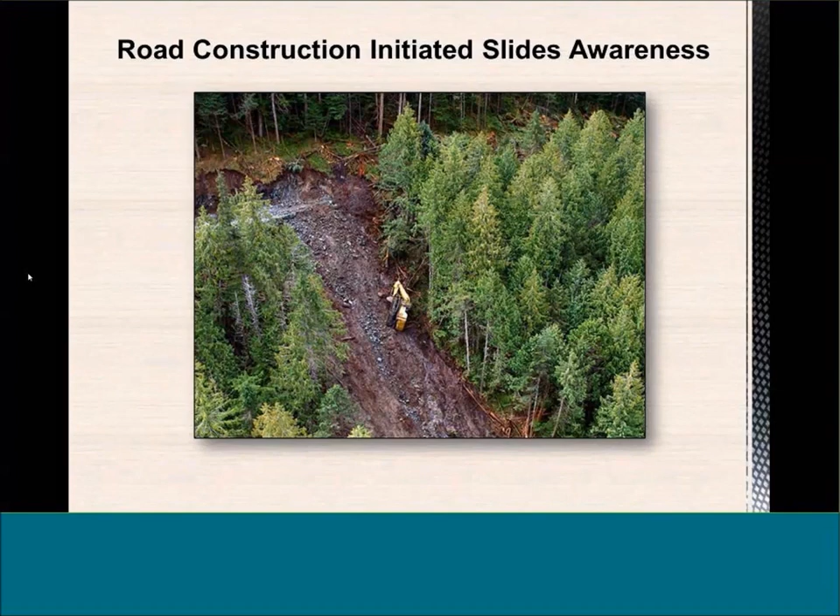During this presentation, we'll give you a brief outline. We're going to talk about the formation of this group, some of our mandate, what we're trying to achieve, and then we're going to get into the details of the construction-initiated slides.

We're going to talk about some of the contributing factors, look at some personal safety related to landslides, and review factors that contribute to them and ways we can mitigate, such as the plan, soil conditions, drainage control, construction techniques, what to do when you change the plan or why a plan should be changed and when, and some of the costs associated with these landslides, both environmental, human, and monetary.

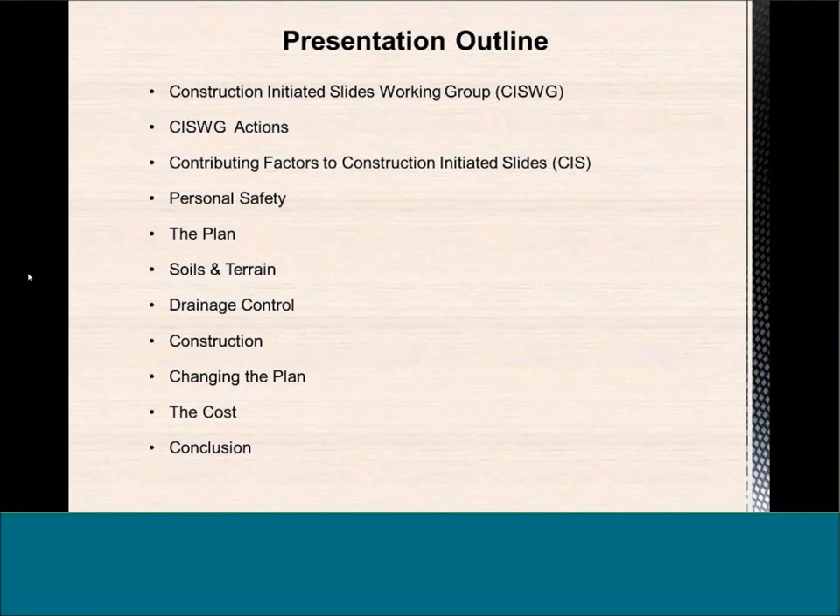And then we're going to sum up with a conclusion. There will be several presenters during the course of this information session, and they will introduce themselves as they come on board.

So again, the Construction Initiated Slide Working Group was struck through conversations around landslides. The forest industry knew that something had to change, things needed to get better. So this group was tasked with coming up with some recommendations and factors to eliminate these types of landslides.

The committee consists of a collection of professionals such as myself, geoscientists and foresters. There's road building contractors that sit on our committee, and we're supported also by provincial agencies. Our focus is to improve coastal road construction to the point where we are minimizing, reducing, and in fact eliminating these types of landslides.

We have short, medium, and long-term strategies. We're trying to look at some of the quick wins, also trying to look at some of the deeper, more challenging issues and come up with something in the big picture as well.

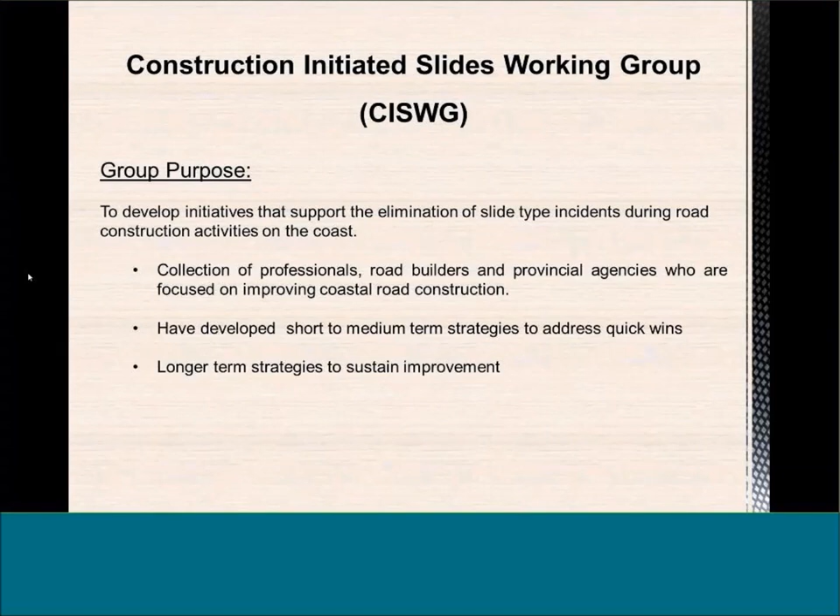So our working group is focusing on data collection - that means how many slides have we had, when and where were they, what caused them, what are some of the contributing factors. We're going to focus on raising awareness within the industry around this significant issue, talk about training methods and resources for crews and professionals, such as this presentation you're looking at, hopefully identify new ways to build road and work through some of these sensitive areas to make work sites safer for everybody, and explore options for monitoring and enforcement of construction standards.

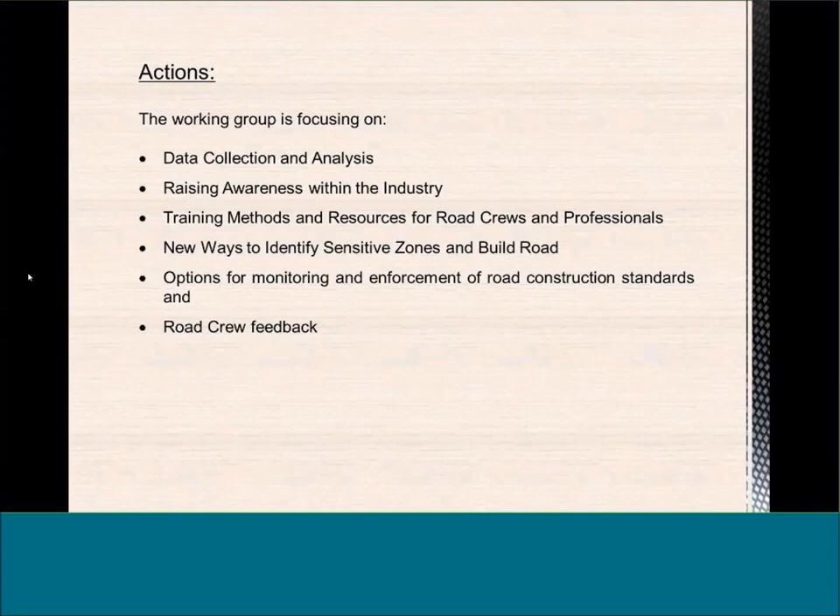And we are also very much looking for road crew feedback. It's very important to what we do. We recognize that road constructors and operators of equipment are very highly skilled professionals, and that can't be overlooked.

So again, for some background, we know through our data analysis that between 2012 and 2015 we had 36 construction-related slides. These are the ones that we know of, that have been reported and that we're aware of. Many of these involved excavators sliding down the hill, such as the one you can see in the picture on the left.

Fortunately, we have had no fatalities during that window, but we have had significant injury. We know that some of these operators have in fact left the industry and never gotten back in the seat of an excavator. We also know that the monetary cost of slides can be very significant, ranging from $200,000 to $500,000. So although there's no physical injury, the cost of these is certainly enough to bankrupt a contractor in some cases, and that trickles right on down the line to all the employees. Not a desirable place to be.

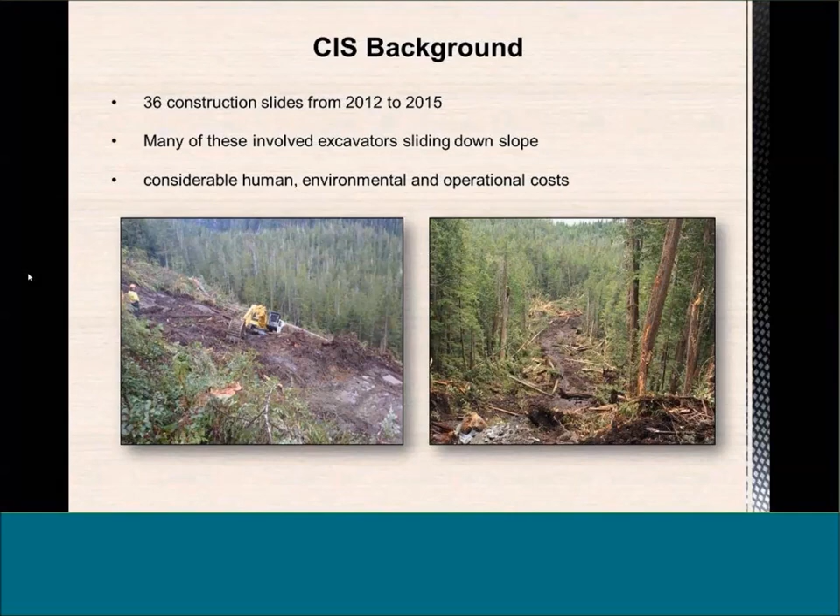If you look at the slide on the right, clearly we've got some significant environmental damage as well, and this has to be considered. The forest industry on the coast is very proud of its ability to work under environmental management systems and leave the lightest footprint we can. So when we're having these types of landslides, we're certainly not feeding into that mantra.

We're going to start off by going through some examples of construction-initiated slides on the coast of British Columbia. We're going to do this just to give you a sample of what's happening out there. Some of you will be aware of these, others won't, but we're going to show you what we've seen, and another reason why we're sitting at the table trying to come up with some ideas and solutions.

This picture demonstrates a set of landslides that occurred in a place called Huaskin Lake, located on the central coast of British Columbia, mainland portion. Both of these slides occurred within one potential cut block setting, and you can see the road heading in the picture as well. You can see how close these two slides were to each other. I'd like you to note excavator number 1 at the bottom of slide 1, excavator number 2 at the top of slide 2, and the two fallers noted in red at the bottom right corner of the slide.

These slides occurred—the first one in April, the second in July. They're very long slides, both several hundred meters long, and conditions for both were what we'd consider relatively dry for that time of year.

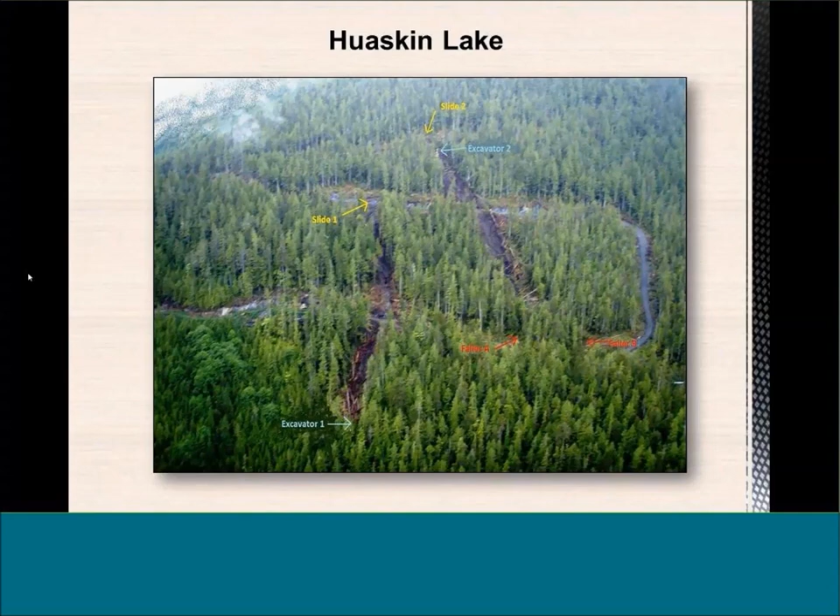So let's get into a bit of detail. This is a photo of the top of landslide 1, or the head of the landslide, which occurred in April. This slide occurred on moderate slopes, 30 to 45%. It was balanced cut and fill, and the road heading was currently transitioning out of a bedrock-dominated cut. So they had just started excavating into a thin pocket of wet, organic-rich soil, which is very common to that central coast mainland portion, over top of some compacted gray, sandy clays.

Above the landslide, the slope showed some wet site indicators such as skunk cabbage, which you can see in the picture, and there was also some Indian hellebore noted at this site. So those were potential indicators of something wet going on under the ground here.

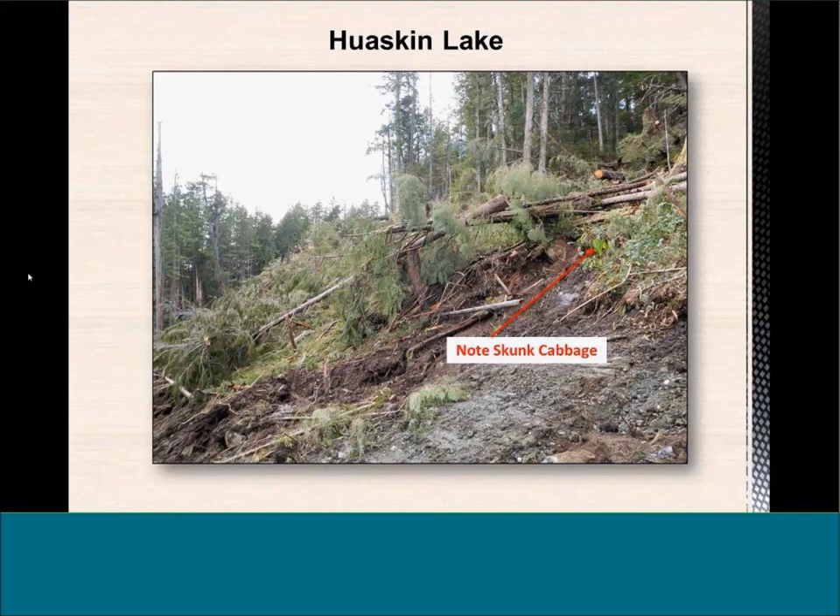Now this is the bottom of the slide. This excavator slid several hundred meters on moderate slopes down to the old road. It was then hit again by more landslide debris and slid another 100 meters before it stopped on a bench. You can see from the photo that this excavator ended up half buried in mud and surrounded by trees. Obviously not a fun situation for the operator, and we know there were some significant psychological impacts to him—it was very challenging for him to get back in the seat and continue his career.

To remove this excavator, a tote road had to be built, so there was extra cost added to this project. WorkSafe investigated this site, geotechnical reports were obtained, further investigations were done, and there was quite a bit of follow-up work to do. We know for a fact that this road heading was shut down for a significant period of time. Eventually the road was moved into the bedrock a little further uphill. Several full bench prescriptions were added, and it was felt safe to proceed even through these wet areas with a more cautious approach. But the key message is the show was shut down, and there was significant time and cost added to the project.

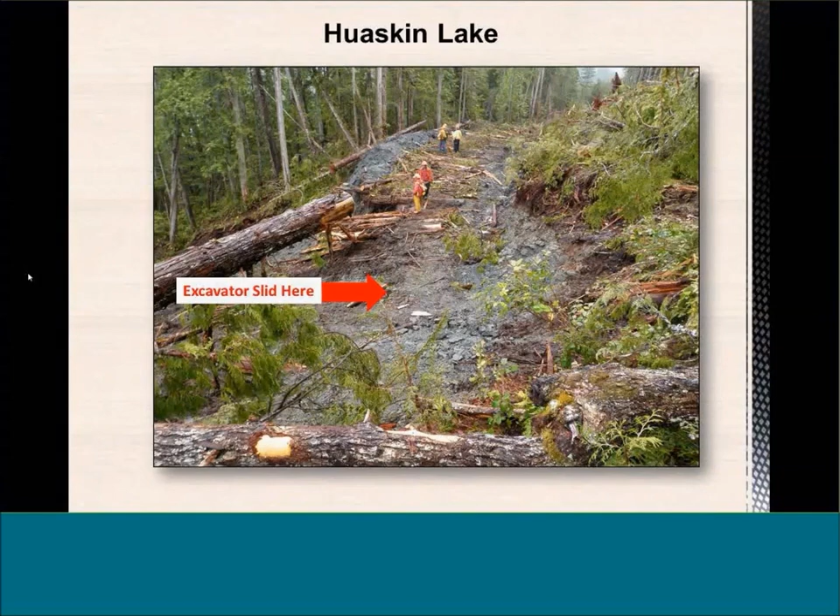Once road construction commenced, landslide 2 happened, in July of the same year. Again, similar slopes, 50 to 60%, moving through a wet draw. You can see similar types of soil in this picture. The prescription here was for full bench end haul, but clearly full bench end haul was not occurring. Rather, the operator and the hoe were working on punching on top of wet organics, over top of compact gray sandy soils—a condition that's ripe for disaster, which is exactly what occurred.

Similar to the first landslide, the operator heard and saw some water flowing around him. The ground gave way about 20 meters below the road, and the excavator slid about 20 meters downhill before his bucket grabbed hold.

Then the landslide continued as a mass of mud and debris, traveling another 150 meters until it crossed the lower road, and ultimately terminated about 250 meters down on some lower benches. So a very long, significant slide.

Certainly, for me, I was very encouraged to see the excavator still at the top of the hill. Who knows what the result might have been if that machine had slid all the way to the bottom.

Eventually, this machine was winched back up the slope, but not after WorkSafe came out to investigate, as well as continued investigations from the licensee.

The geoscientists had to come back in and take a look, and ultimately it was decided that this road heading should be terminated due to very high risk, and this harvesting opportunity was ultimately lost.

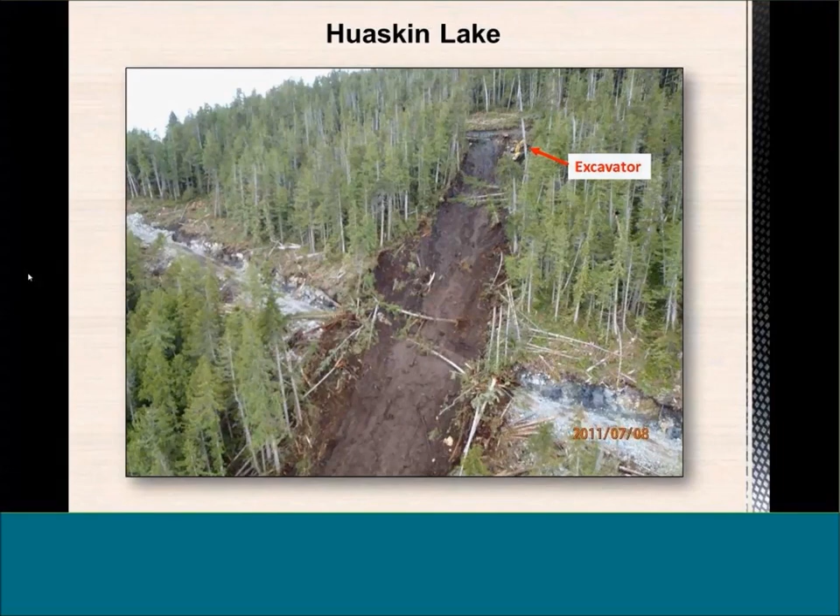The next example is of a slide that occurred on Yeo Island, also located on the Central Coast. This particular operator was just completing an end haul transition zone.

He was on some moderate slopes, again 50 to 60%, when he encountered a pocket of deep, wet organics, similar to what we saw in the previous examples, and some subsurface water. I visited this site, and you could actually see water piping out of the hillside just above this landslide.

These obviously were not identified on the original plan. It was dry conditions - you wouldn't have seen them, and you wouldn't have noted them. So very tricky to catch all that in the plan, but in the end, the operator saw it.

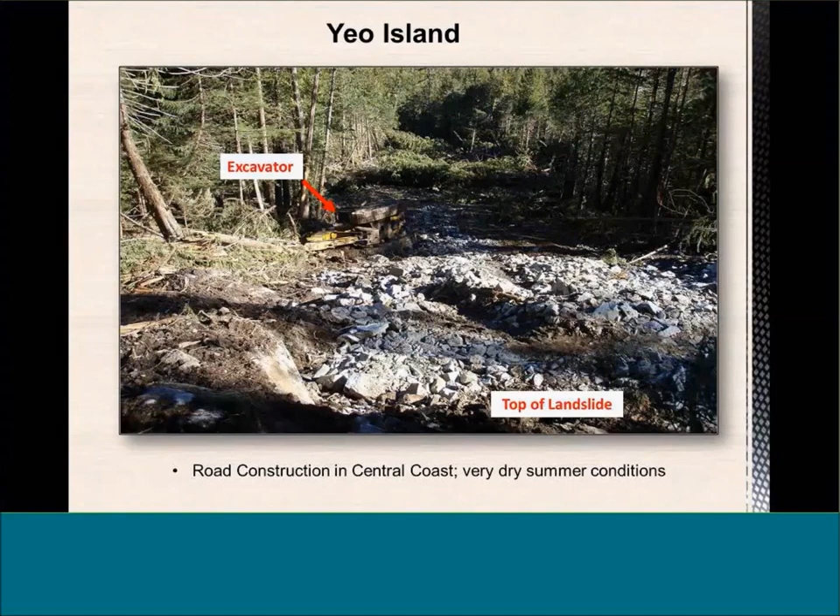The operator didn't stop and ask. He didn't stop and seek any clarity or advice on the plan or the changed conditions he was noting. He continued to move ahead and ended up with his excavator on top of wet organics over smooth bedrock. And very quickly, his excavator decided to migrate to the bottom of this hill slope in a landslide.

This picture gives you a little bit of an idea of how potentially disastrous this could have been. Why the excavator stopped and flopped over on its side and stayed put there, we're still not sure, but we're very fortunate, and the operator was also very fortunate.

This operator left this site that day and, to my knowledge, never got back in a machine or built road again. On top of that, this site was shut down for 6 complete days.

During those 6 days, geoscientists, WorkSafe inspectors, company reps, and others inundated this site while they tried to come up with a second plan. Ultimately, we had to build a tote road down to this machine and remove it. So think of all the costs involved with those things.

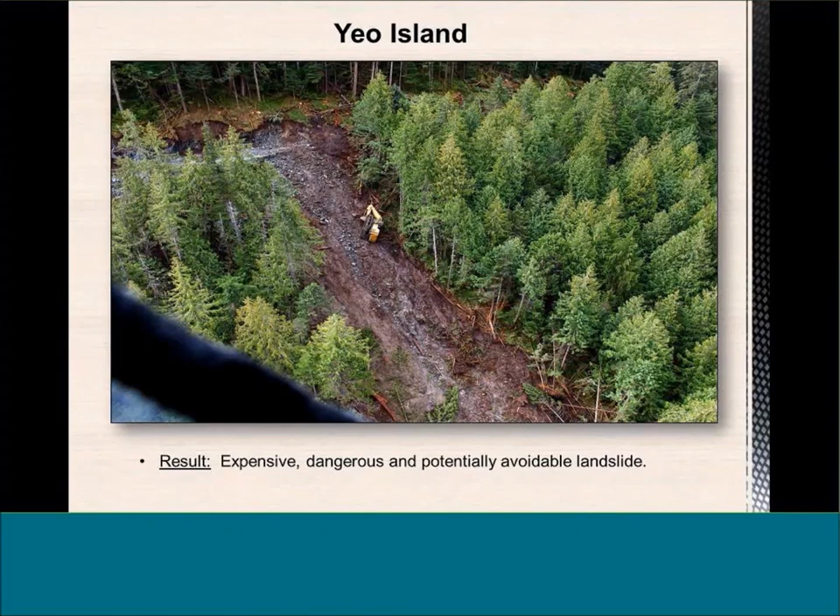In fact, here are some of those costs. Again, while this operator wasn't physically injured, it was a very significant incident for him.

This picture shows, again, how little that excavator looks in that big slide. But in terms of costs, there was cost to repair the excavator, cost in lost production, and cost in transportation in and out of this site to come up with remediation plans.

There were professional and administrative costs, and the contractor also incurred a $26,000 cost to build a tote road to recover his high-valued excavator.

The lost harvest opportunity was approximately $400,000 on this site. These numbers were reaffirmed by the contractor, and the total direct cost of this landslide was...

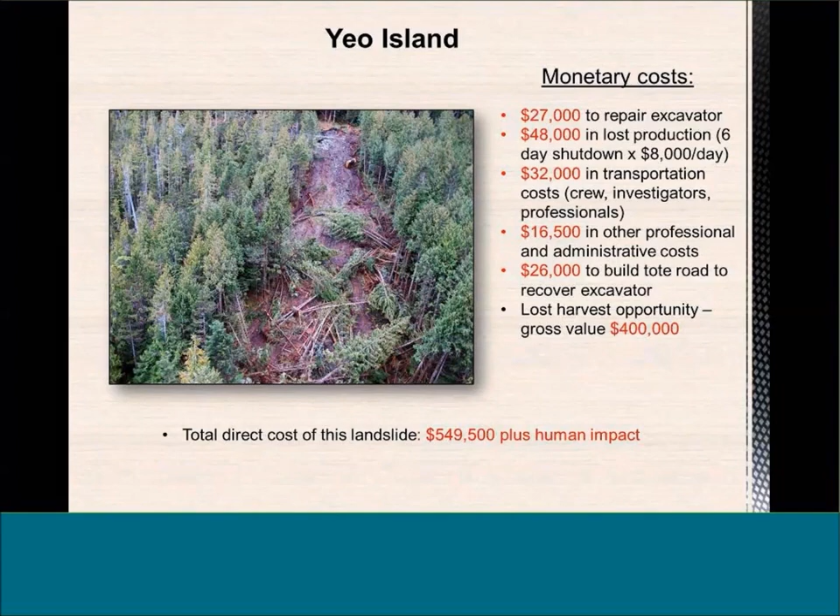$549,500, and that's just the monetary cost. It does not include the human impact. Think of how that bill could impact your contracting company if you had to receive it.

The next example is a landslide that occurred, but it has a little more favorable story and a better result. This landslide occurred in Holberg, located on North Vancouver Island.

It occurred in a very dry period, in fact during several years of drought. The landslide occurred near the height of land and was in a conventional construction section, again a cut and fill type construction section just coming out of an end haul piece.

Slopes were around 50%, but here's where things are different from the previous examples.

In this particular case, as the operator was moving forward, he noticed a very deep, wet, organic pocket in the transition zone coming out of the end haul. He had just come past the bedrock knob, and then things changed.

He noted what he called blue clay, which on the local crew meant trouble. If you saw blue clay, you knew you were in a tricky situation.

What this operator did really well was he stopped and asked for a reassessment of the plan. It's never easy to stop. We know that it costs money, we know that anytime you have to shut down your productivity, it's not a good thing from a monetary point of view. But in this case, the operator stopped and asked for a reassessment of the plan, and it turned out to be a very good thing.

With the operator's professional advice, and upon a little look at the layout, we decided to move the center line into the bank. We approved additional end haul, which increased the cost of this road, but that was not a hard decision to make. We knew that safety was the top priority, and we certainly didn't want anybody ending up at the bottom of this hill like you'd seen in the previous slides.

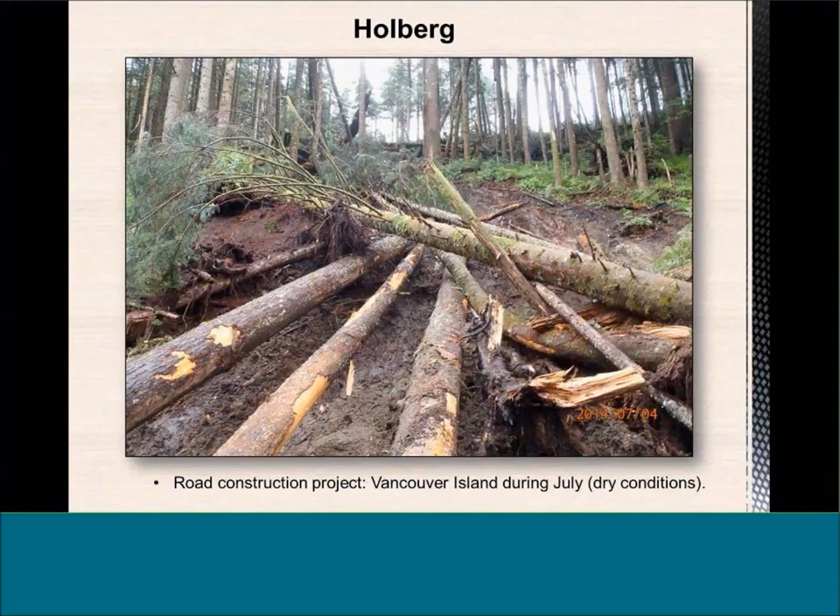So even though we moved the road in slope and we took some time and reassessed this plan, we still had a slide. The message there is, these things can happen even if you put your best foot forward, but the critical piece is stopping and making sure you're doing the right assessment and asking for help. Again, no equipment was impacted, no personnel ended up at the bottom of this hill, likely due to the proactive approach taken by the operator.

If the additional end haul had not been approved and the center line had not been moved in slope, I think it's fair to say that it's extremely likely that excavator would be down at the bottom of this hill, and we're not sure what those consequences could have been in terms of life and injury.

There's also environmental damage that goes along with these slides. This slide was about a quarter of a hectare in size, so about half an acre, and that's relatively minimal compared to what could have happened if this operator had not stopped and taken the time to ask some real hard questions and provide his professional advice on the ground types that he was seeing.

Cleaning up the slide was also a lot easier simply because the slide was smaller than it likely would have been. And again, key message here, nobody was injured, and that's really what we're focusing on.

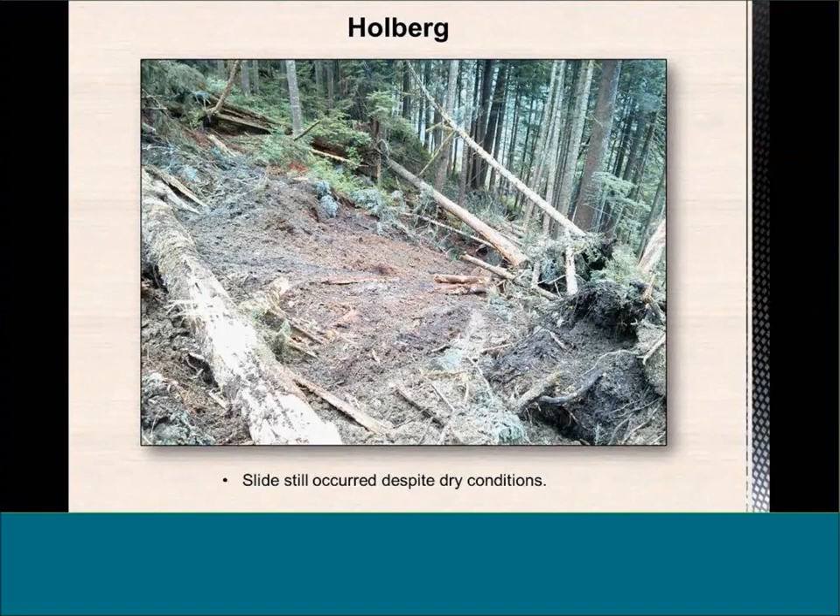So we'll talk a little bit in this presentation about some of the contributing factors to slides. We know they occur on Vancouver Island, through the South Coast, Haida Gwaii, and Central Coast areas in a regularity that frankly just isn't acceptable.

Some of these factors that affect the risks of the slides range from environmental factors such as water, weather, soil types, and bedrock to other factors such as planning, production, how are you doing business out there, and obviously operator competence comes into play. If you have the wrong operator in a tricky situation, you can certainly be adding to the risk of creating a landslide. And change conditions.

What do we do when we have a change in conditions? What do we do when we see something that looks different than the plan? These are all factors that are very important to be considered as we move through these road headings.

I'm going to wrap up my section of this presentation talking about personal safety. I'm going to give you a few slides that discuss some of these factors. Again, the reason why we're here talking is about personal safety. We want to ensure everybody's making it home at the end of the day just like you do. So it's paramount, and that includes the planning and construction phases.

This isn't just about how the operators are doing business. This has to do with the plan as well. Like any other work site, if a potential danger or hazard exists, if you're seeing things that you think might cause a landslide, it's very important that you stop work, move to a safe area, talk to your supervisor. Very important that you do these things.

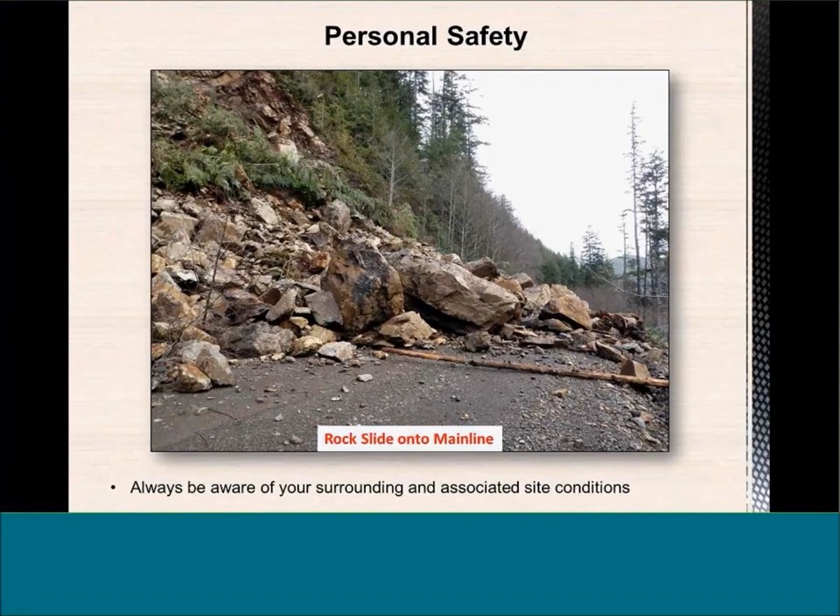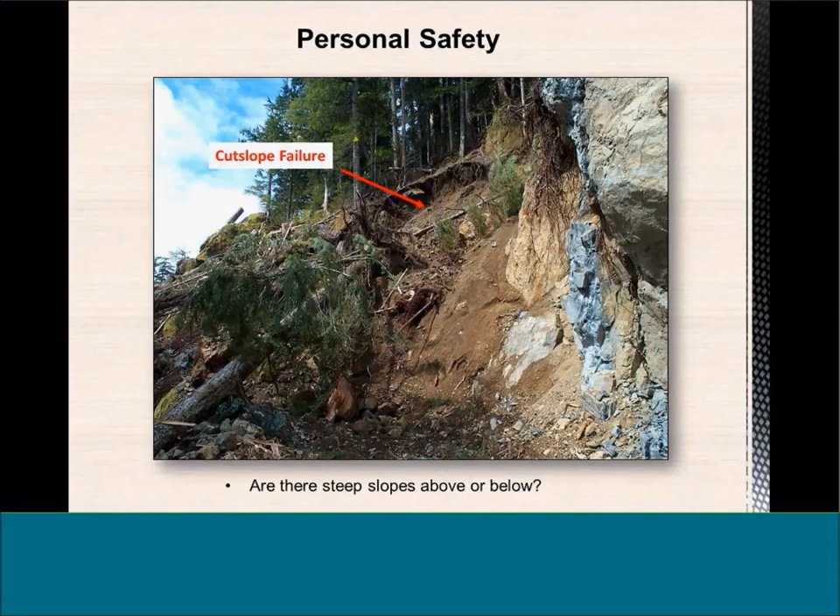So the most important message with personal safety is don't risk it. Play it safe. Be conservative here. This is your life we're talking about.

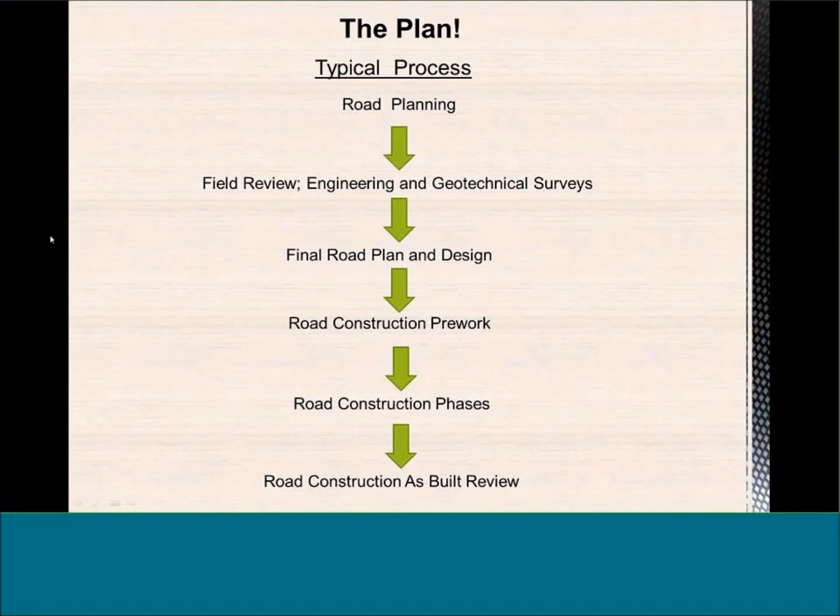And then we go straight into the road construction phases where you guys are strong, and as you build your roads, of course, that gets reviewed, and we make sure it's all set up nicely, and we're not running into too many problems. From there on, we can have some nasty-looking plans, something like this. You got to be able to read this stuff, and mostly it's telling you how other people that have investigated the area, the slopes you're on, the ground you're in, figure that road needs to be constructed.

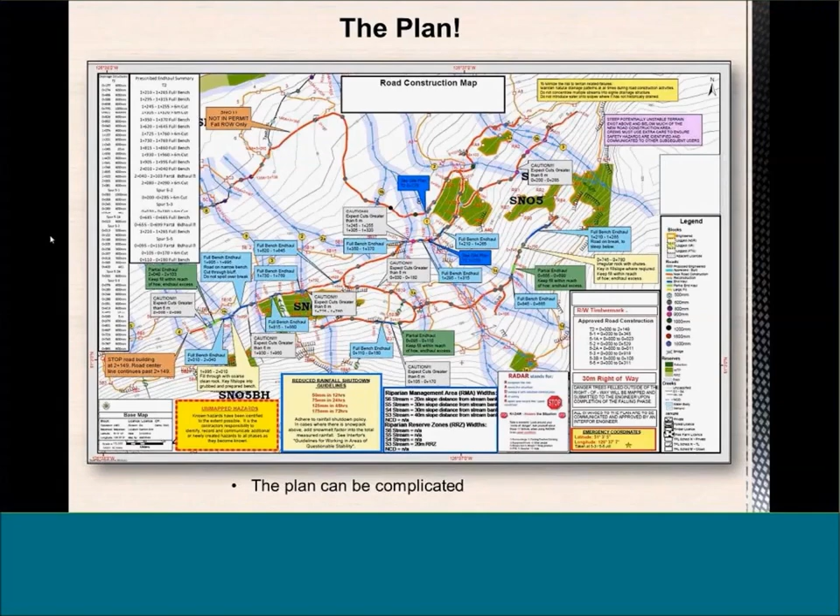If you're going to be stepping outside this plan, then you need to talk to your supervisor, who needs to talk to the other team members who have actually come up with this plan to say it's the safest and the best way to build this road and harvest this area. So have a clear understanding of that plan, even though it may look pretty gruesome from the start. Just make sure you know what you're looking at. If you got questions, talk to your supervisor, and then if he's got questions, he can talk to what's called the coordinating registered professional, who will deal with what exactly needs to be done on site there.

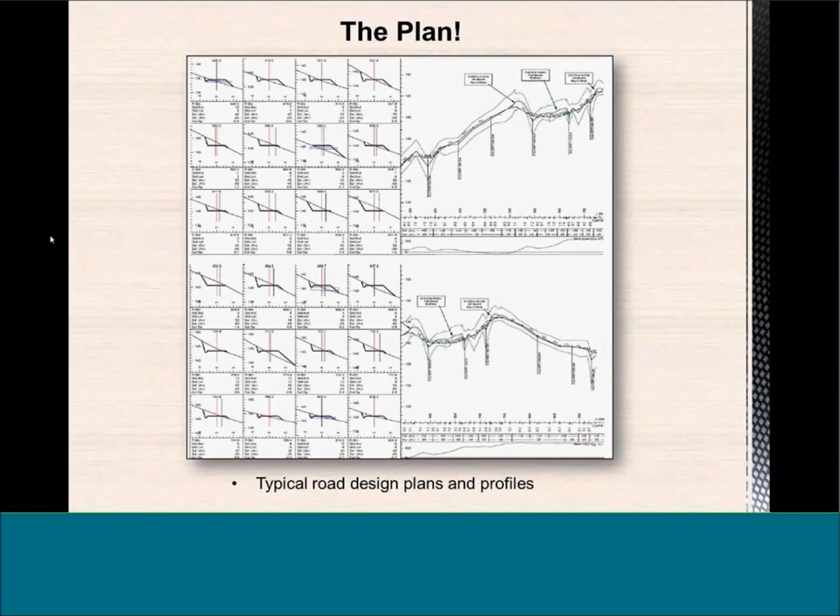We need to have that feedback mechanism on those plans and profiles. Quite often, if it changes substantially, there definitely could be an issue with regards to where you're hitting those targets. Quite often there's control points, so we can have the road up or down the slope from that center line. So if you're going to be substantially off that center line, your supervisor needs to know about it and where that target point is and make sure you can get back to it.

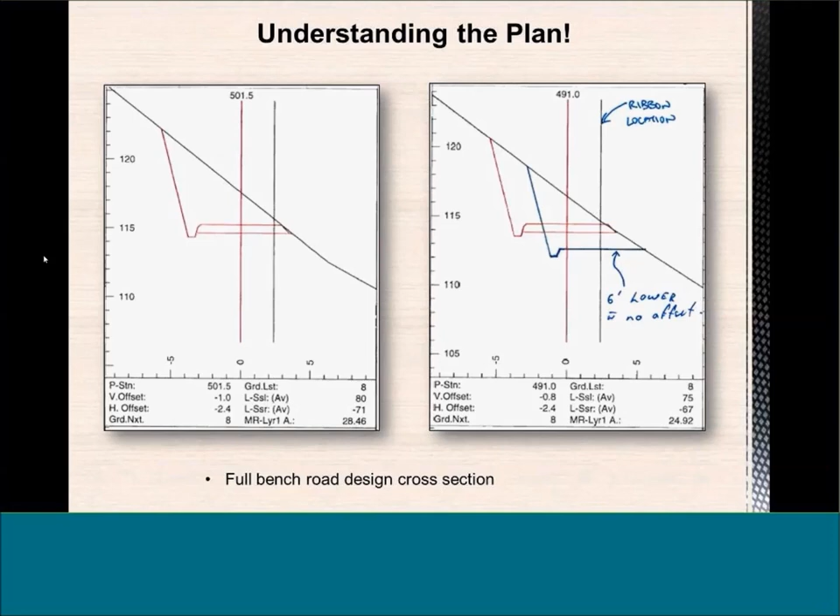The more into the slope you are, the better, the safer you are. Of course, I think we all know that. Quite often, if you see that center line hanging out over the slope, maybe you should stop and say, hey, I'm going to bring this in. If it's significant, stop work and consult your supervisor first before doing that.

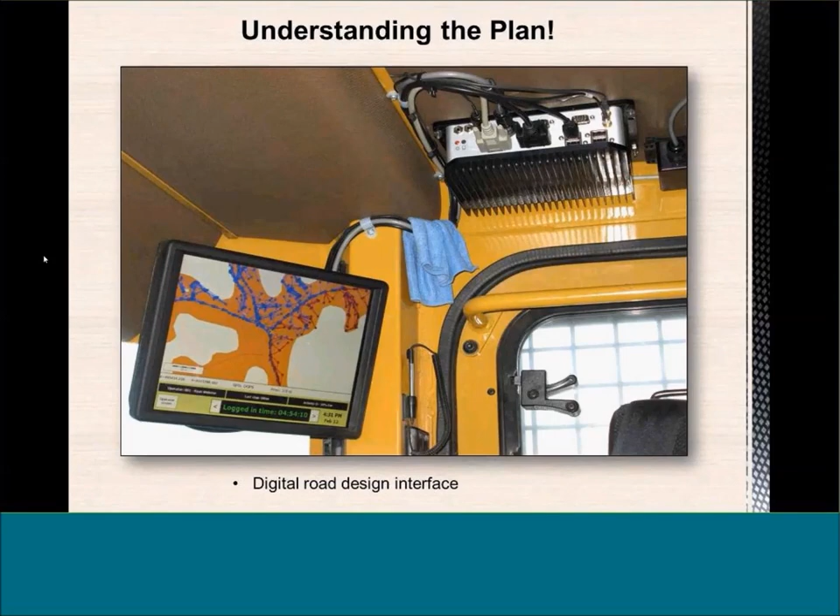All plan maps should have on what your hazards are along that road. And make sure if you see a hazard out there and it's not on the map, then you better stop work and get it put on the map. So the things that I look for when I'm out there, much before you guys are, I look for signs of instability on those slopes.

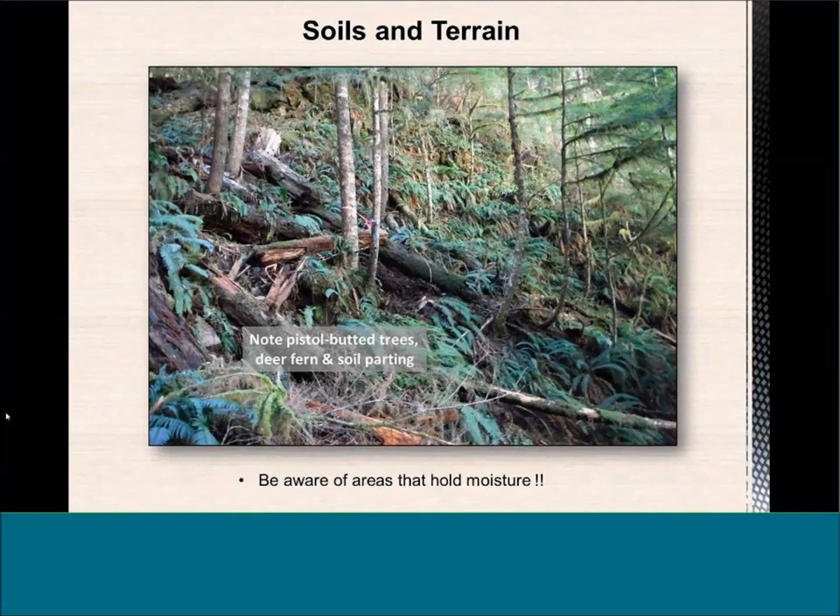Here we've got some sort of pistol-butted trees, lots of deer fern. You can see the soil parting on the hill slope here. So you see it's like little mini benches, and the soil's parting, basically breaking away from the main mass. These slopes are actually holding moisture in certain areas and parting it and letting it go in others. So let's be aware of that.

I don't always catch these out in the field. Sometimes, especially on old roads, they're hidden by alders or something like that, and I don't get to see them. But when you're in your excavator and you're uncovering that stuff, you might see something we don't. And in that case, stop and ask for assistance on this, whether you should be proceeding or not.

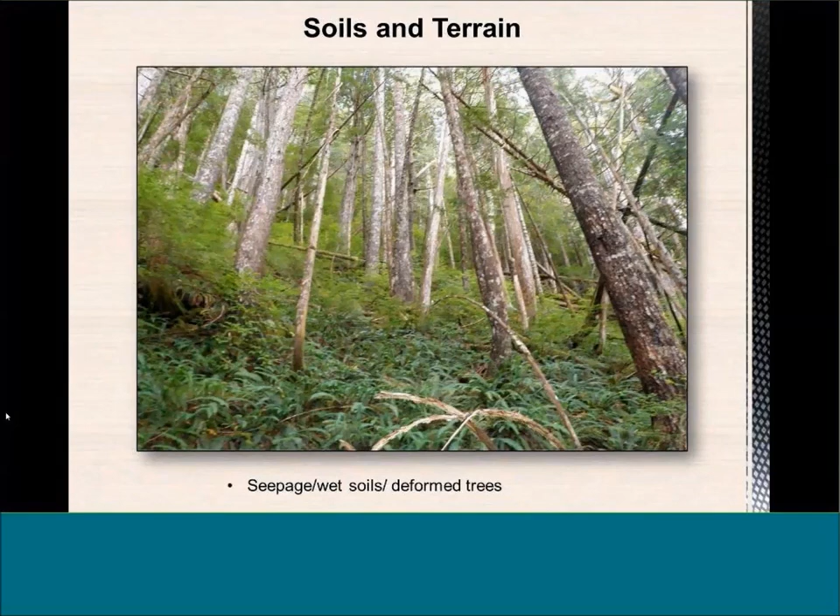What do we usually want to do? Pull in some puncheon, which is okay if you're on fairly gentle slopes and you're well in the inside. But if you're on steep slopes, puncheon is not recommended. Bring that rock in there, build that road subgrade up. Make sure you're sitting back into that hillside, and don't be hanging over the edge there. Organics is one of the worst enemies out there.

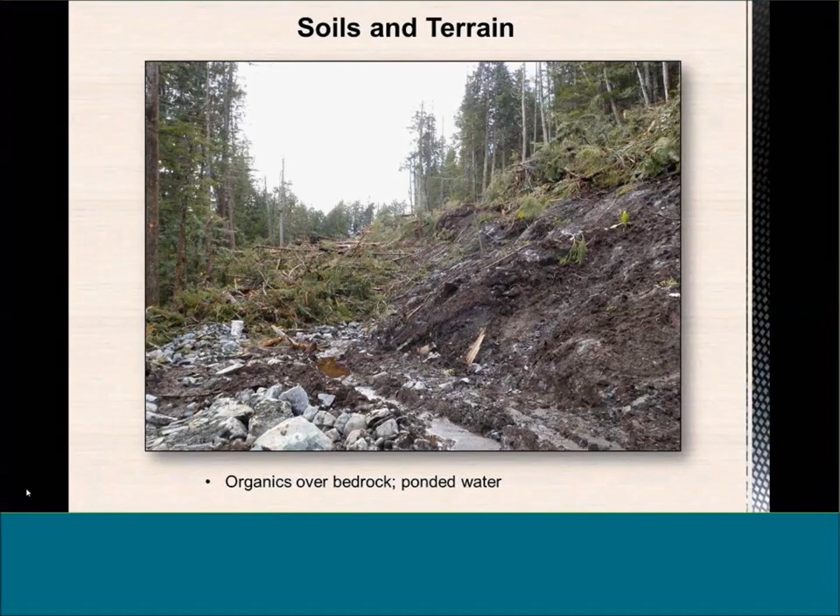So continuing with soils and terrain, which show some slope movement or what we call soil creep. These areas should be avoided. So if you're coming along in an excavator or on a drill or in a dozer or whatever, and you're seeing this kind of activity where we've got a big new scarp that's come in and it's not on your map or no indication of hazard or anything, stop work, go back to a safe place

and let's get somebody else in to have a look at this, because it may have been a time since your road got approved, and maybe this thing has happened over the winter or maybe over the last 5 years. We're not sure when that geo was in there looking at that. So make sure you stop.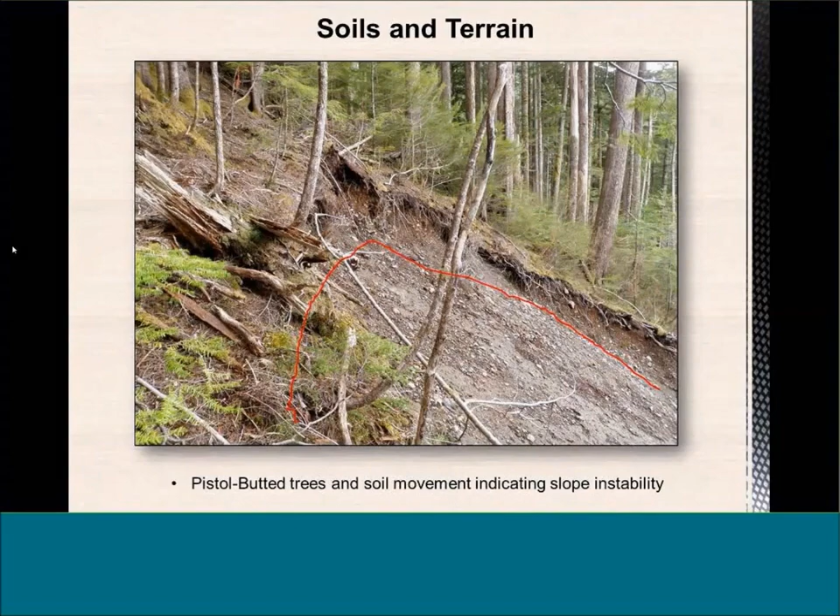Again, these are sort of what we call jack strawing of trees. So this is looking down one of those slides. I think it's the one on Huascan where we actually full bench end hauled through the top of this, and we're looking down through that. And you might think, well, that looks like normal forest, but it's really not. These trees are crisscrossing and going all over the place. We call it jack strawing. Some people call it drunken forest.

That's the kind of stuff you don't want to be hanging out on for too long. You want to be sitting on a good solid platform when you're constructing that road, and probably not putting anything over the edge either. It should be a full bench section.

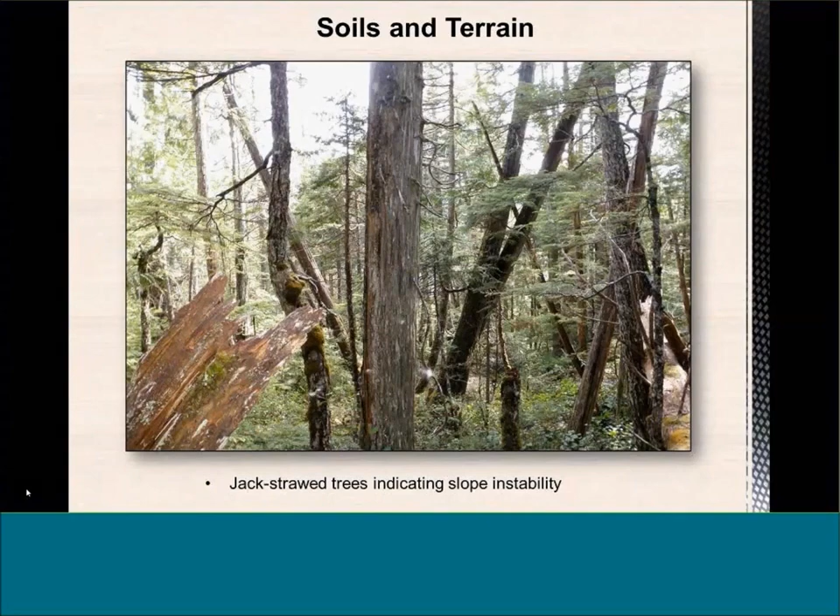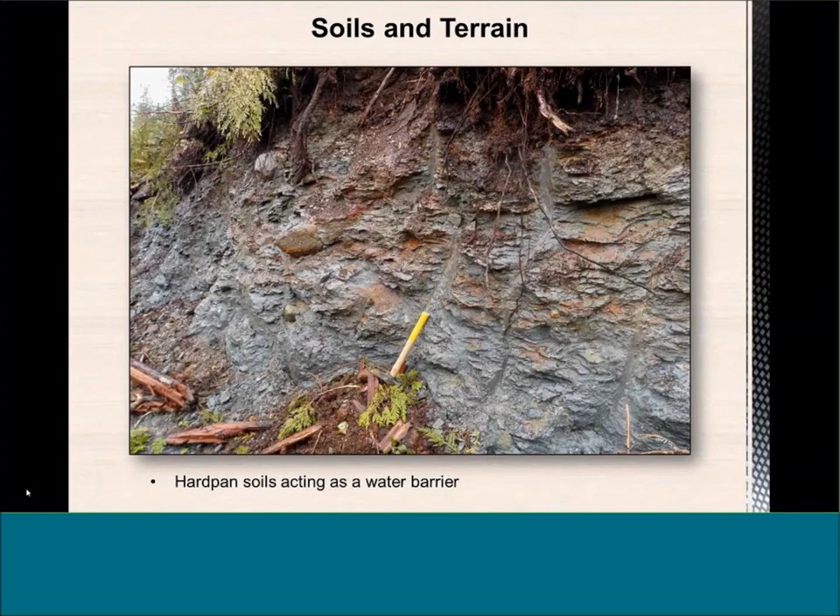Here we got some really thick clay soils acting as water barriers. Hard pan soils. This was an area of slide initiation on that second landslide in Huascan. Got organics over top, so they're sort of soaking up the water. This is not letting the water through, so we've definitely got some water barriers happening, and things can happen on steeper slopes there for sure, and even on moderate slopes.

Rock, although it's one of our best friends out there, we like to have a lot of rock around us when we're building road. It can be pretty deadly as well. Here you see this is a nice failure plane right along here, and there's that rock hanging out over top. So, if we were to go ahead with this road, we got to undermine all this rock. It's coming way down from up here, probably about a 50-meter length, and then back down on the road.

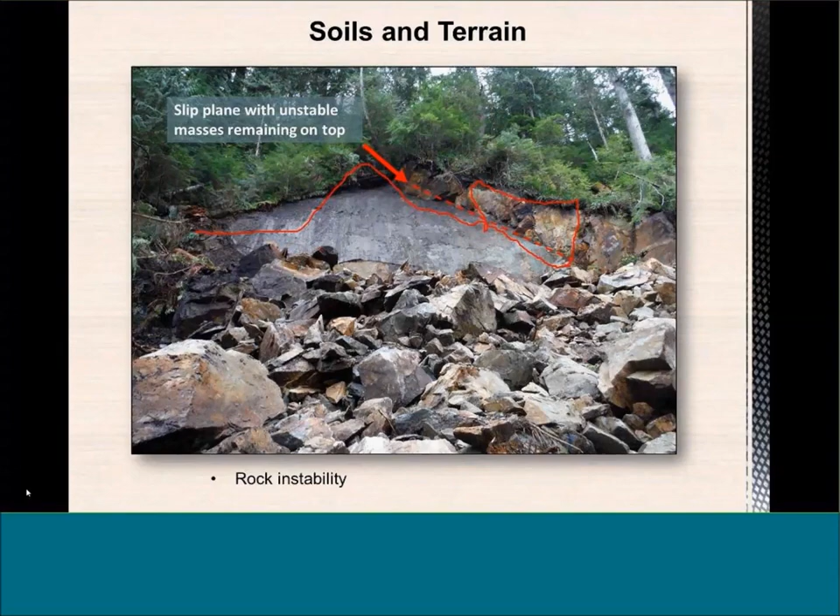So we want to excavate that rock. It's going to be pretty slow excavating if we go through there, and a lot of volume. And then you got to evaluate, is it worth it? Anyway, big thing here is to stop and talk to your supervisor, and if you got to get somebody else in to relook at this, do so.

This is one for organics. This was a slide that actually started on probably 40 to 50% slopes above, a yarder sort of pulling down, and all of a sudden it hit a big patch of skunk cabbage and went slowly down the slope, and then hit a 10-meter high bedrock bluff and picked up steam and basically flooded right up 6 meters to the grapple yarder operator's feet. That also pushed the grapple yarder, I think, a meter back off the road. So no major damage done, no injury, but scarier than heck.

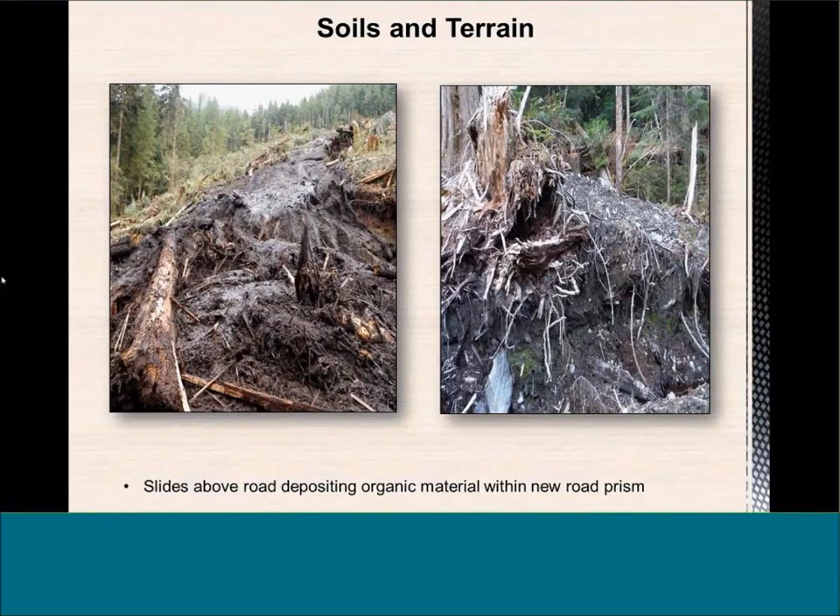And here we have some other material sort of hanging out. Sometimes we're building roads through this organic material, and it can be soupy enough to just plop out and go places. So just be aware when you got a lot of this black stuff hanging around. These are some of the plants. Skunk cabbage up on the top right here, false hellebore, fields of those. They're often real organic sites. Same with a lot of Devil's Club. Again, we see a lot of these in old slide tracks, a lot of indications of water.

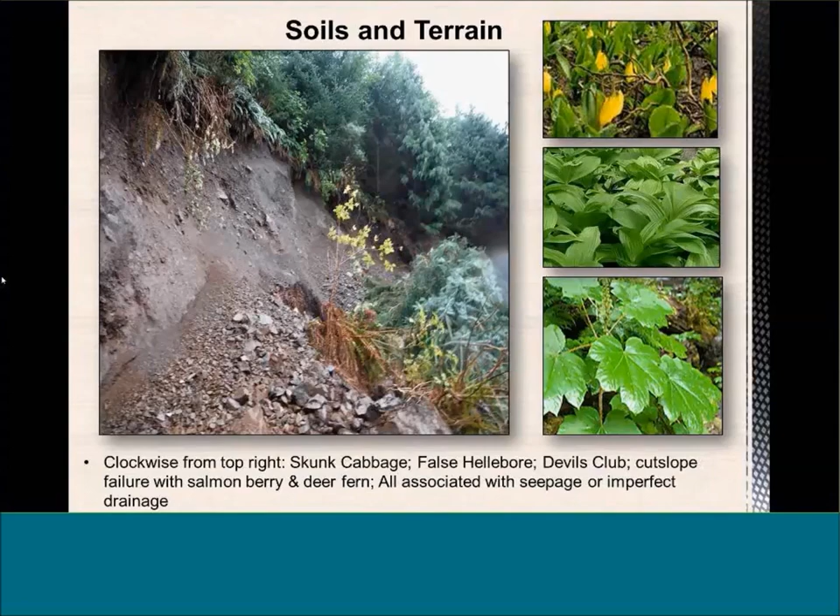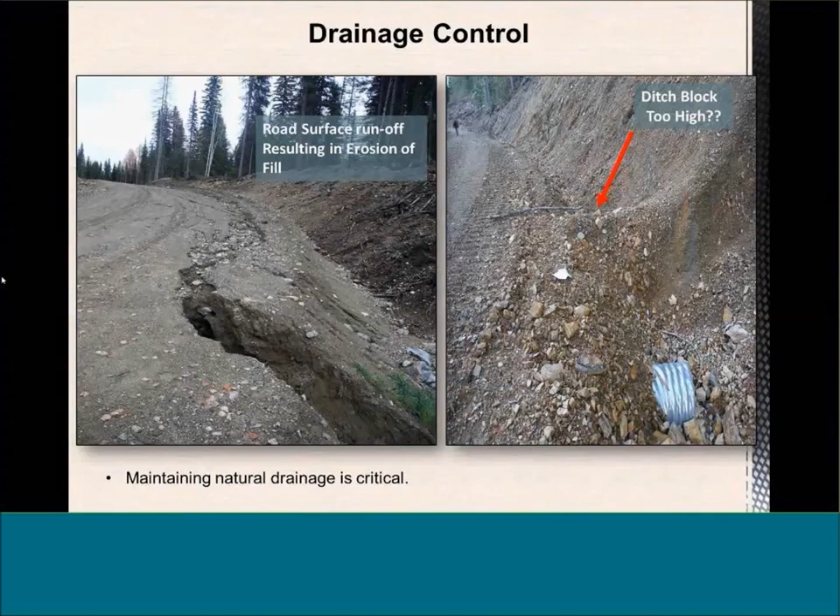Salmonberry, you see salmonberry on this slope that failed, gave us an extra high cut we weren't expecting. Drainage control, really important. I can't stress that enough. Basically the water's running down the road grade here and taking out what I believe is the inside ditch on this side. On the right-hand picture, the ditch block is way too high, so if there was water coming down that ditch line, it's going to pop over that ditch block, cross the road and take out the fill slope probably. So keep that ditch block below your road surface so it can flow down to the next culvert.

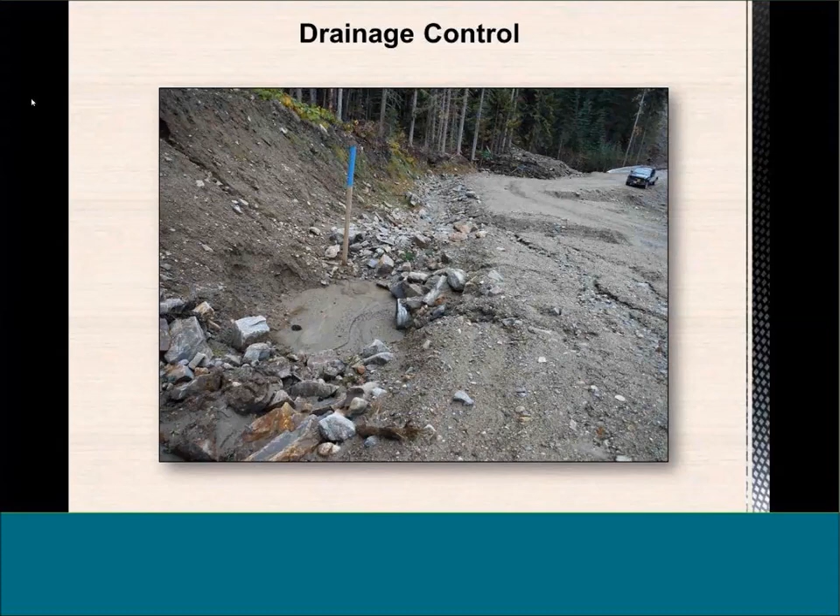Drainage control again, here's some stuff. Maybe we need a bit more armoring around this catch basin here for the culvert. It's washing right out. We've got a lot of fines coming down that are going to plug this culvert pretty soon. It's going to take off on us. As you can tell, this road was a bit of a hassle because we've got lots of highly erosive sandy sediments coming out of these banks. So even building the road was a real challenge.

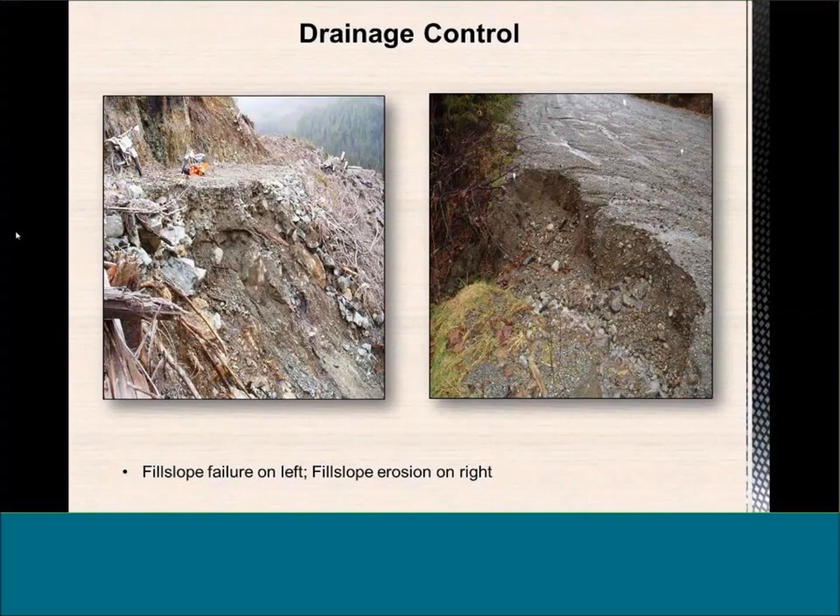Here we've got, again, sticking with drainage control, one where the drainage wasn't controlled, wood in the subgrade. Eventually these old roads give out when we're on steep slopes and you got wood in the subgrade. And away it goes. We can't even get through there. And now we've got what looks like steep bedrock on the left-hand side, and chances are it's going to be too much to take out to reopen this road.